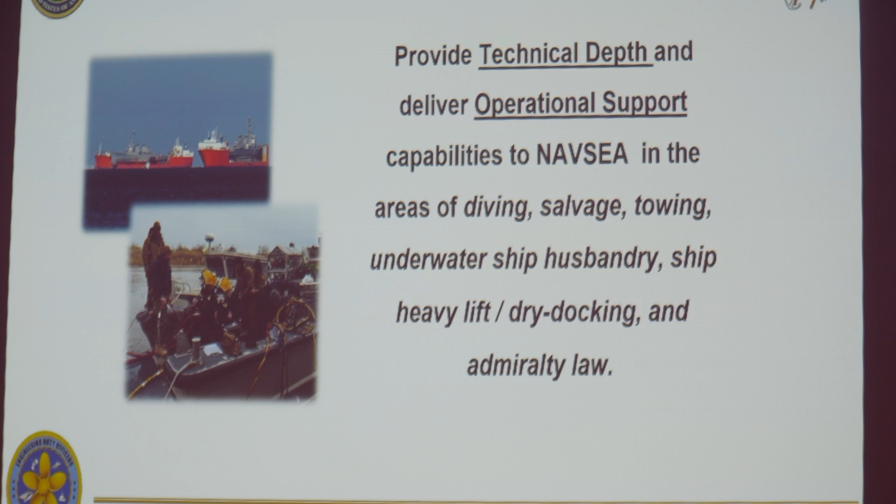A little bit of the unit history and how we came to be. Prior to the bombing of the USS Cole, there was no heavy lift capability. The USS Cole was the first emergent heavy lift of a large warship, and out of that evolution came a realization of the need to have this capability and the instructions how to do it somewhere within the uniformed service.

Over the past 10 years, the unit has conducted or participated in over 25 heavy lift operations, including emergent operations, planned operations, some of which included multiple ships and multiple lifts. Those tended to be smaller vessels, such as MCMs or PCs, that were deliberately being transported over longer distances and through more open ocean conditions than it made sense to have them go independently.

Some of our other projects, including tow of decommissioned vessels, support for vessels being transferred for foreign military sale, and a couple of specialized salvage projects, including the SSSB, which will be covered later in this brief, and the tow of the Bonhomme Richard following her fire.

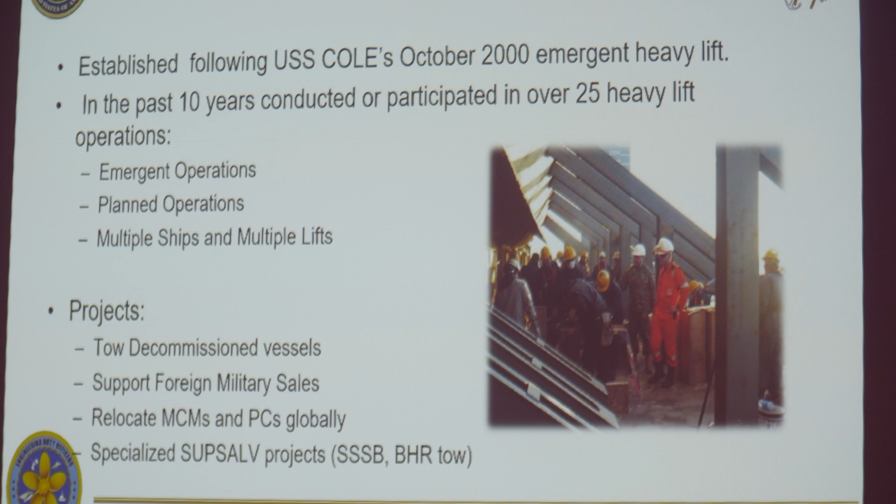Our general training pipeline involves a qualification as docking observer, typically through a regional maintenance center, occasionally through the naval shipyards, followed by training in additional blocking and stability qualifications. That's a separate qual on top of the docking observer qual. Then completion of the NAVSEA dry docking course, training on the use of POSSE, or the commercial version more commonly known as HECSALV, training in setting up vessels for tow and tow operations, and then observation of heavy lift operations.

That is the kicker, because of the scarcity of heavy lift operations, especially over the past several years. The qualification pipeline takes anywhere from 3 years, when there are a lot of operations ongoing and a lot of opportunities, to over 10 years for officers who have been stuck in the qualification pipeline.

So there are 35 heavy lift billets, but there are actually 42 officers on our roster, and that comes from the nature of the way our billeting works within the reserves and the rotations. It allows people who are being rotated to primarily support other lines of effort to keep working on those quals, again, because of that long timeline and scarcity of training opportunities.

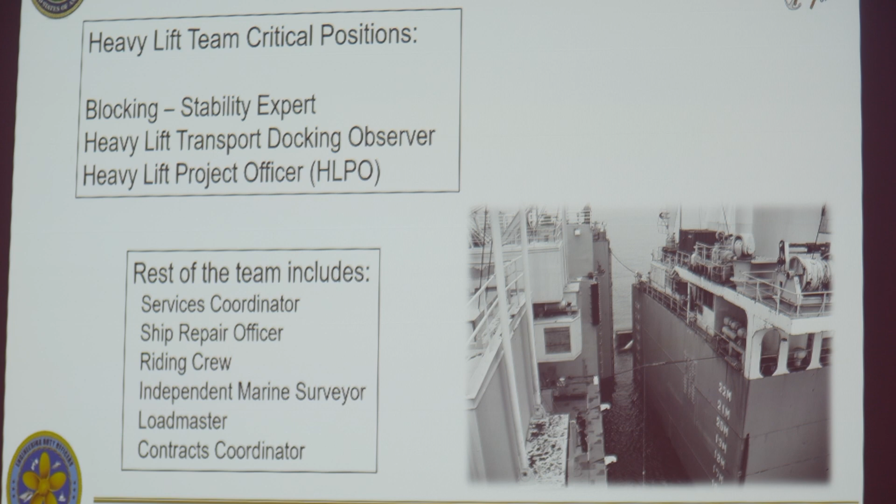In planning the evolution, the transporting contractor will provide a transport manual, and the heavy lift unit will verify all of the calculations and estimates that were made. So there'll be a detailed review of the transport manual, including descriptions of the heavy lift ship and all her particulars, overview of stowage plans, review of all the block loading calculations and sea fastenings, overview of the loading sequence.

The services and logistics tend to seem like something that would be a minor part of this in comparison to all the engineering that goes into planning how to secure the load and safely move her. However, for the most part, ships are not meant to sit empty and without power for long periods of time. And so there is still a need to provide some minimal power, to provide firefighting capability.

In particular, with the lift of the McCain and the Fitzgerald, what was very quickly realized is that international fittings often aren't, and that the lift ships, none of which are designed for lifting a destroyer as their primary customer, their primary service are oil platforms or a series of barges, were not equipped natively from ship systems to provide the amount of firefighting water and power needed to support the destroyers.

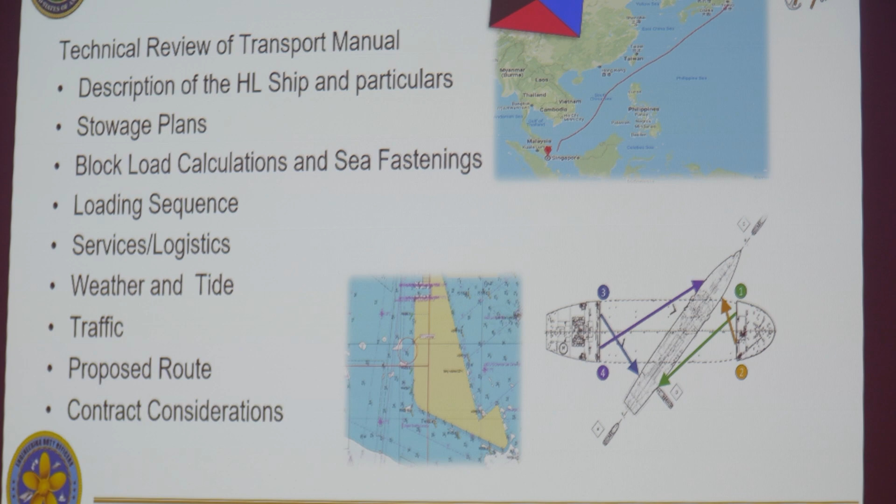In looking at the loading calculations, the proposed route, and the risk of weather, the typical sea states along that route are taken into consideration. There's a lot more sea fastening and a lot more work that goes into planning a lift that's, say, going down the coast during hurricane season or going across the Pacific than something that's going from Norfolk down to Charleston.

And I already mentioned some of the contracting considerations.

That wasn't supposed to show up that way.

All right, so in a dry dock, as all of you know, you have your keel blocks support the displacement of the ship, and you have side blocks to resist the overturning moment and support a small fraction of the ship's displacement. In the heavy lift, we add spur shores to further resist the overturning moment that comes from rolling at high angles and the additional wind loads that the ship will face in transit. And you have sea fastening to resist the longitudinal and lateral motions or sliding of the load on her blocks.

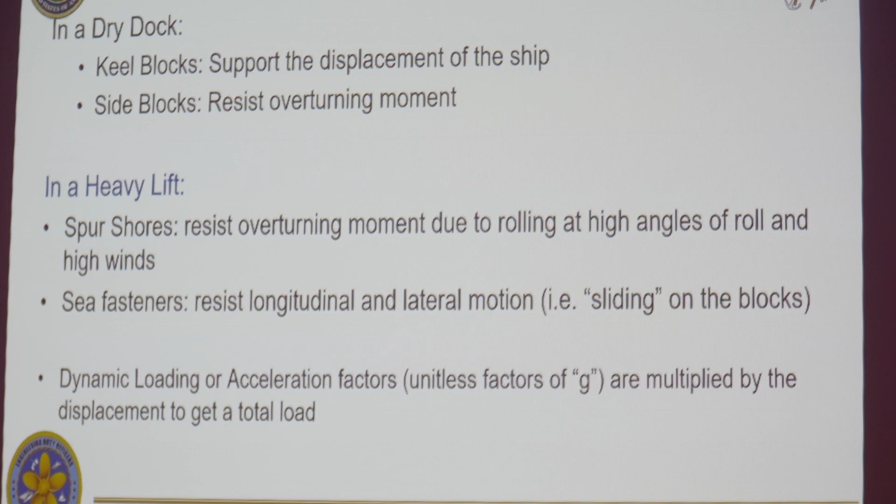There are two ways of approaching these calculations. We're going to review the calculations as they're outlined in the U.S. Navy tow manual, which is a little bit different than the method that's presented in Principles of Naval Architecture. The Navy tends to look at these calculations as dynamic loading or acceleration factors that are unitless factors of G, and then are multiplied by the displacement of the vessel to get a total load. For the most part, this yields the same results.

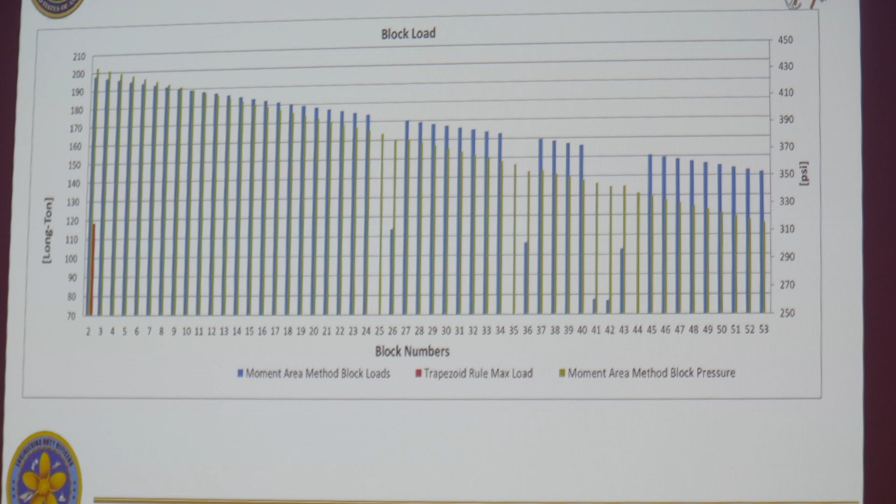In starting the planning of an evolution, the first thing we're looking at is the block loading across the typical docking plan. Most of our assets that are heavy lifted are in a damaged condition, so the trapezoidal method of calculating block loads works well if you have a continuous keel line. As you can see in this example from the McCain, which had a significant area of underwater damage, that would not have been adequate for transporting her over open water. Using the moment area method produced much more accurate results, which were later verified with strain gauges.

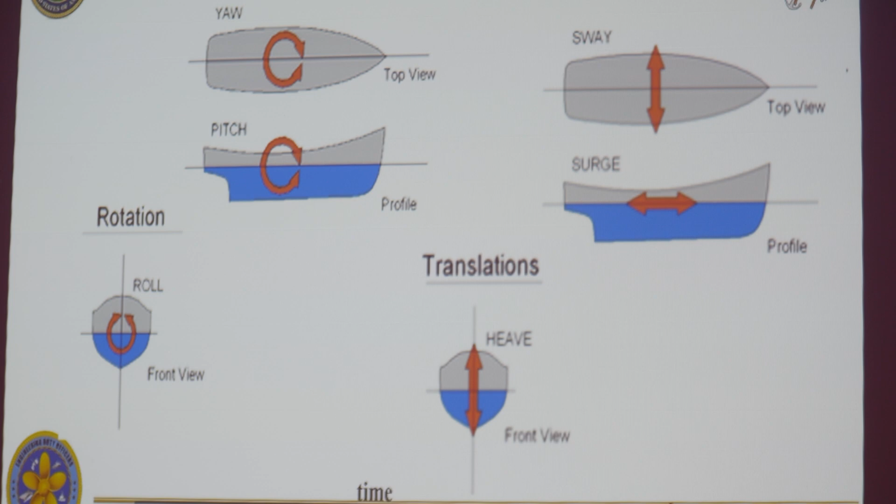The lift ship is always the frame of reference in planning the lift evolution, so we're looking at rotation and translation across 3 axes. Everything in planning the load movement is measured relative to the center of gravity of the lifting ship. This is a little bit different from the way most other calculations are presented.

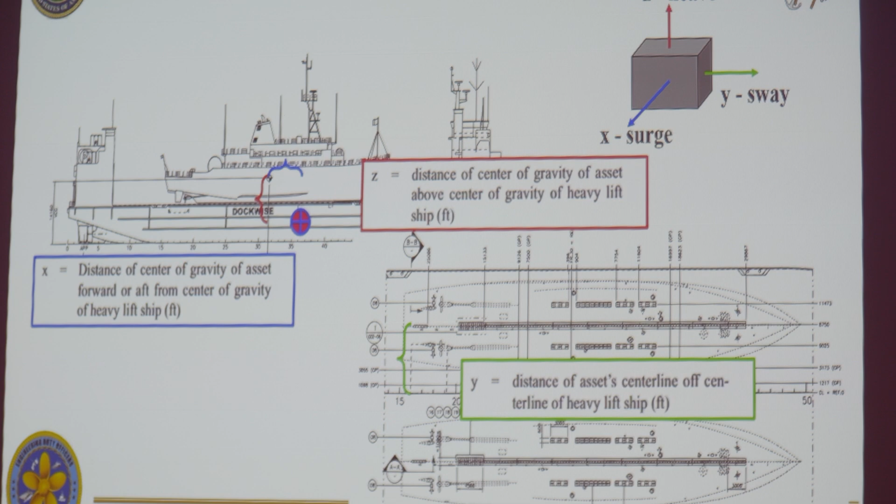A brief overview—here is the vertical acceleration formula. One note: the first term accounts for the vertical displacement of the ship initially, and then everything that follows accounts for the dynamic sea loading. So the pitch and roll of the load in transport and the period of pitch and roll are critical in determining the amount of sea fastening.

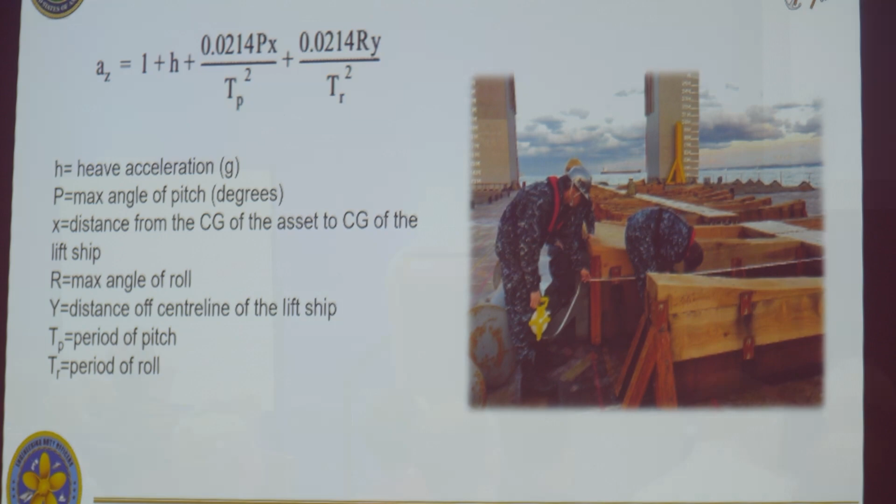There are tables provided in the tow manual to help one make a first best guess in pre-planning a lift, but typically that's all it is—a first best guess. The sea fastening design is further refined based on the seakeeping characteristics of the lifting vessel and data typically gathered from NOAA's buoys or other oceanographic sources about the expected sea states and wave periods on the route of transit. That's why route planning is a large part of looking at one of these evolutions.

Similarly, the athwart ship's acceleration is shown here, again looking at max angles of roll and pitch, periods of roll and pitch, and distance of the CG from the CG of the lift ship. You can see in the lower photo a side block, and then some sea fastening preventing motion of that side block across the deck of the lift ship.

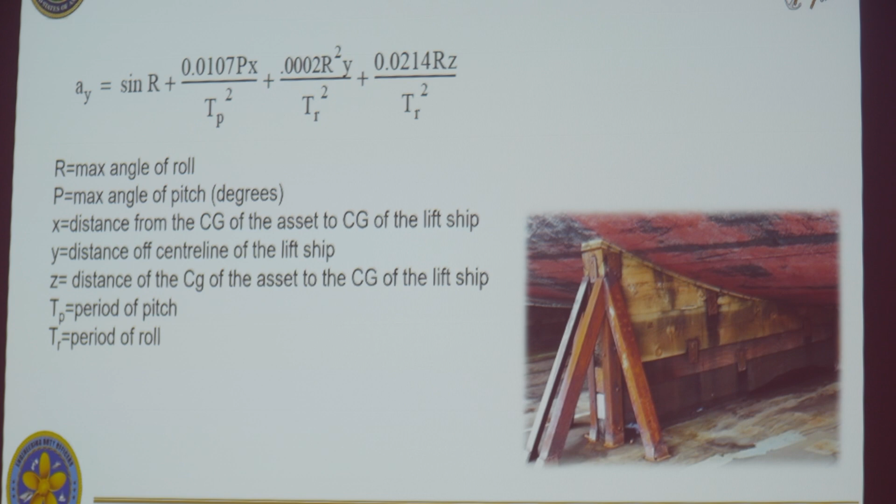One of the first considerations in planning sea fastening versus looking at a dry dock is that I'm not trying to do maintenance on this vessel—I'm just trying to move it from point A to point B safely. Whereas in planning a dry docking, I may want very high blocks to facilitate dropping a rudder, accommodating a propeller, pulling shafts, or doing a full inspection of the bottom, in this case I want the smallest blocks I possibly can get to keep the CG of my load as close to the CG of my lift vessel as I can.

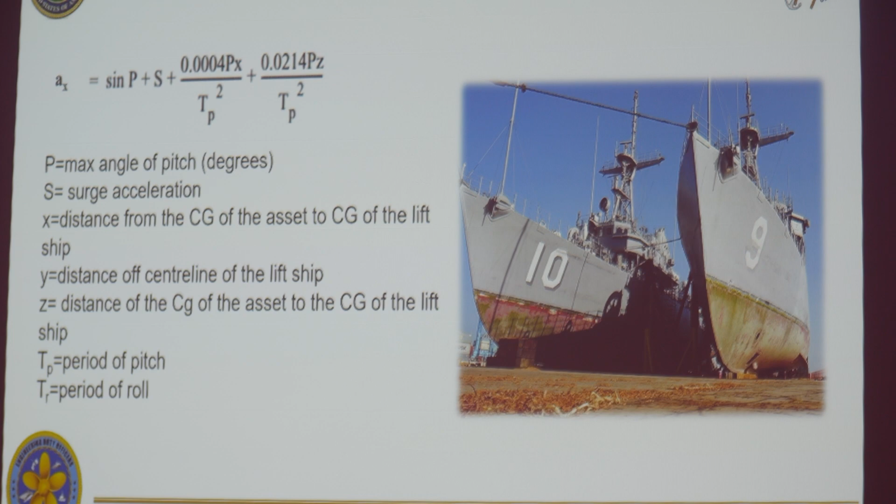Here you can see 2 MCMs nested side by side on a lift ship, along with the formulas for longitudinal acceleration. The step-by-step of how to calculate sea fastening is presented in the tow manual—it would be longer and more involved than Joe wanted me to get into in this particular forum, but I think they do a reasonably good explanation of how you get there. In contrast, Principles of Naval Architecture takes a look at the forces independently and then adds them to the total displacement.

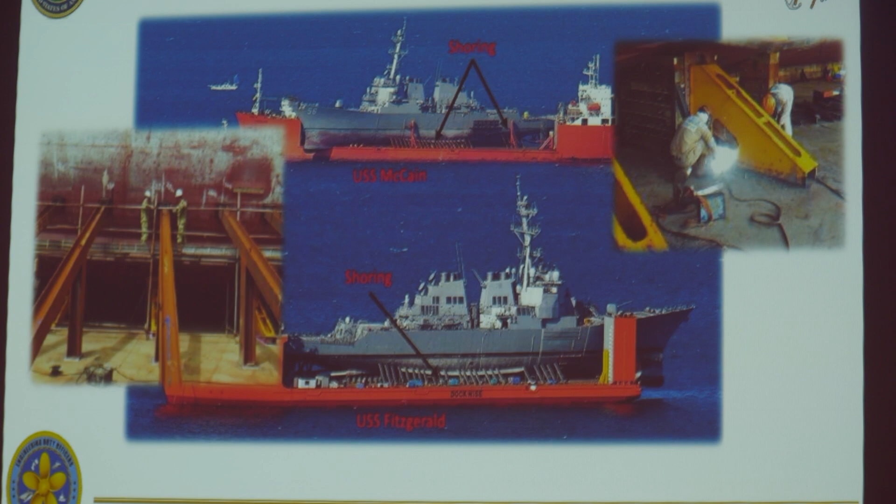One of the other things you can see in the photos, you have 2 officers inspecting some of the shoring, that gives you a good sense of scale for the spur shores and the sea fastening being installed on Fitzgerald. And here's a little bit better overview of the positioning, particularly of one of the ships across the deck.

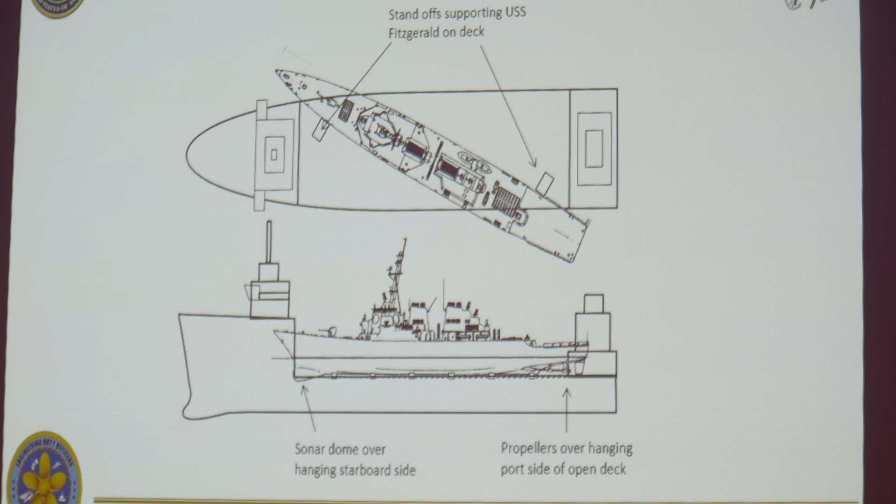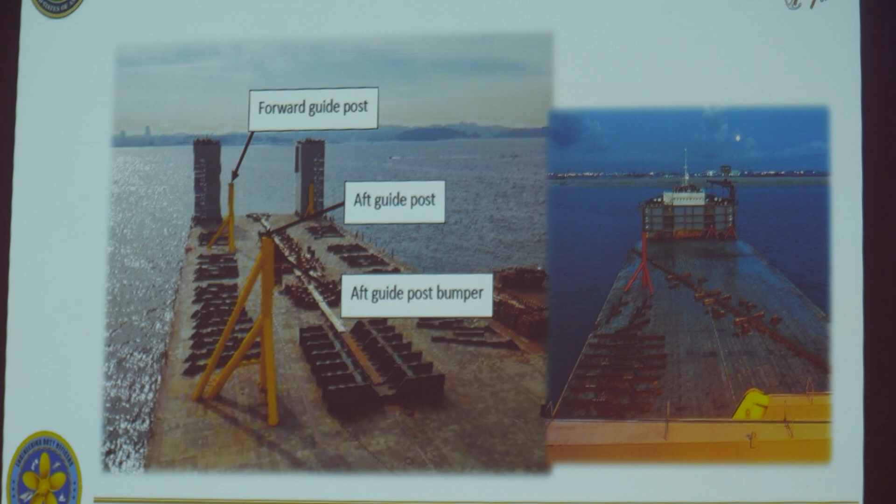Here's what that looked like in real life. The guideposts are exactly that, positioning markers. So when the lift ship submerges, there are very few landmarks, if you will, to use to properly center and position the load over the build. That is the function of these guidepost bumpers. They also provide some sea fastening support, but because they will be fitted up tightly against the hull during the final preparations, they're not included in most of the planning as anything other than positioning guides.

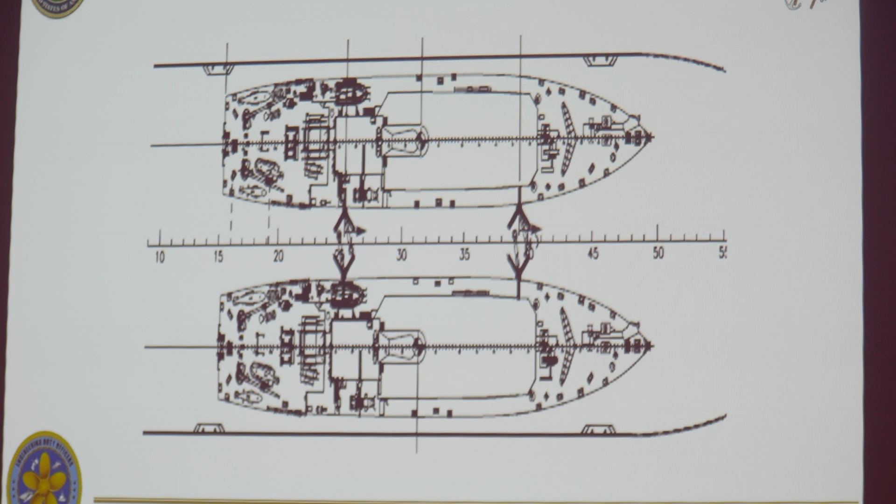This is an example of an MCM guidepost layout with two MCMs side by side on the lift ship. One of the challenges in moving MCMs is they have a tumble home hull. So whereas many ships, the max beam would be at the main deck, the MCMs actually turn slightly inward, getting slightly narrower as you come up to the main deck. When this lift was actually conducted, this was not fully accounted for in the planning of how those guideposts would contact the hull to verify that the MCMs were firmly over their build. So the final configuration actually had them somewhat more askew.

This is a brief overview of POSSE, or again, the commercial version of HECSALV, showing that we can model the lift. This is often used as a secondary means of verifying the loading plan and modeling whether or not the lift ship is adequate to carry the load fully and fully support it.

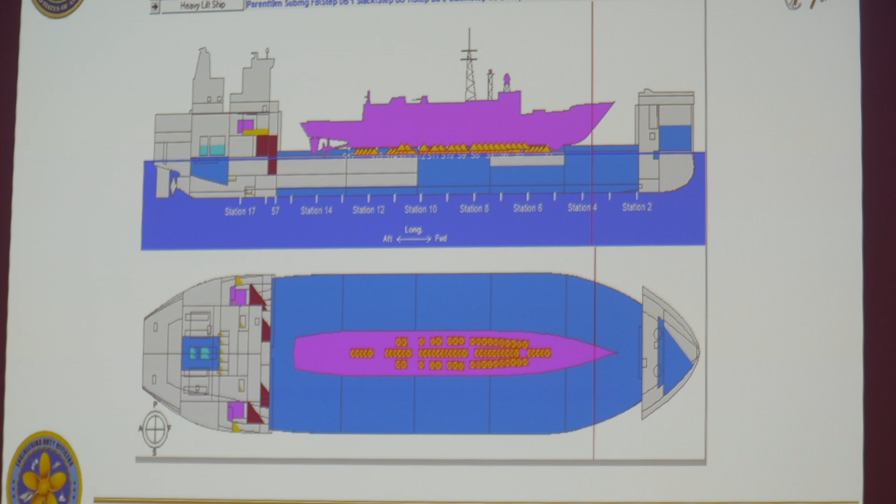So the two big, sort of infamous emergent heavy lifts the unit recently participated in were the response to the collision of the USS Fitzgerald in June of 2017, just southwest of Tokyo. The ship was towed to Yokosuka for temporary repairs and then heavy lifted to Pascagoula for further repair. Unfortunately, about 2 months later, the McCain had her collision in August off the coast of Singapore. She was initially towed to Singapore for temporary repairs and then lifted to Yokosuka for permanent repairs.

There had been a plan to lift her to Yokosuka to perform some initial remediation and then do a second lift either to Pascagoula or to Bath.

So some of the lessons learned that came from planning the lifts, one of them was there was a tight time frame and a very small weather window for some of the work that was conducted. And so after the ship was positioned over the build, but before she was fully deballasted, the work crews started positioning the sea fastenings.

This created some future problems, because the lifting ship was flexible relative to the amount of load that she was carrying into her positioning. And so those sea fastenings that seemed to be tight up against the hull and firmly supporting the load when they were inspected, once the ship was fully deballasted and in a seaway, there was gapping in them. And that led to the cracking that you can see in the picture there.

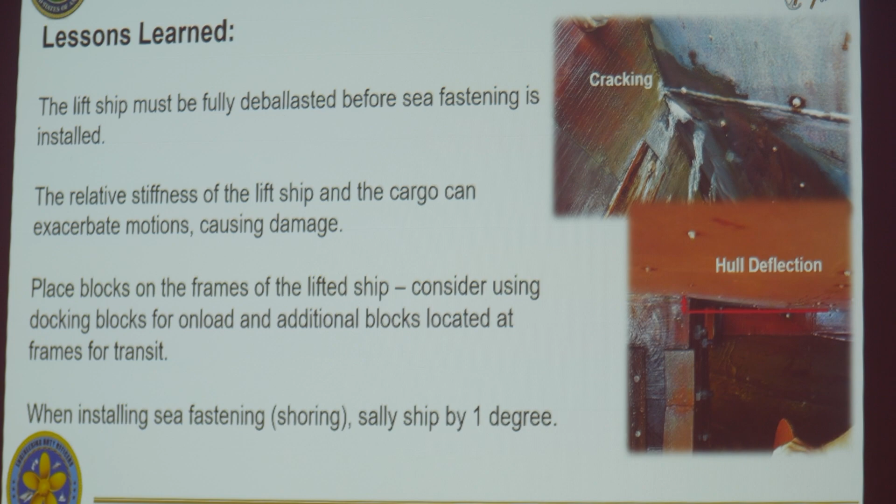The other revision to the procedure that came out of this was that when installing sea fastening, not only to make sure that the lifting ship is fully deballasted, but actually to sally ship by 1 degree in each direction. So induce a deliberate list of 1 degree, install the shores tight against the hull of the load on the opposite side, on the high side, and then roll her in the other direction by 1 degree, and install the sea fastening tightly against the other side.

For the most part, when we did this on the next lift, it worked well. Unfortunately, there was a new problem.

The team did start with the original docking plan and then moved the blocks to accommodate the intersections of the frames, and they sallied ship when they loaded her on. This ship had room to fully support Fitzgerald in a fore and aft configuration and mitigate a lot of that motion between the load and the lifting ship, but the deck was not initially strong enough to support Fitzgerald's full load.

So rows of grillage were installed to better spread the load of the DDG across the cargo ship. The positioning of the grillage and the revised docking plan was designed based on tables of offsets that were provided with the hull. But the team during the design used the longitudinal framing tables rather than the transverse framing tables, which didn't fully account for the change of rate of curvature of the hull.

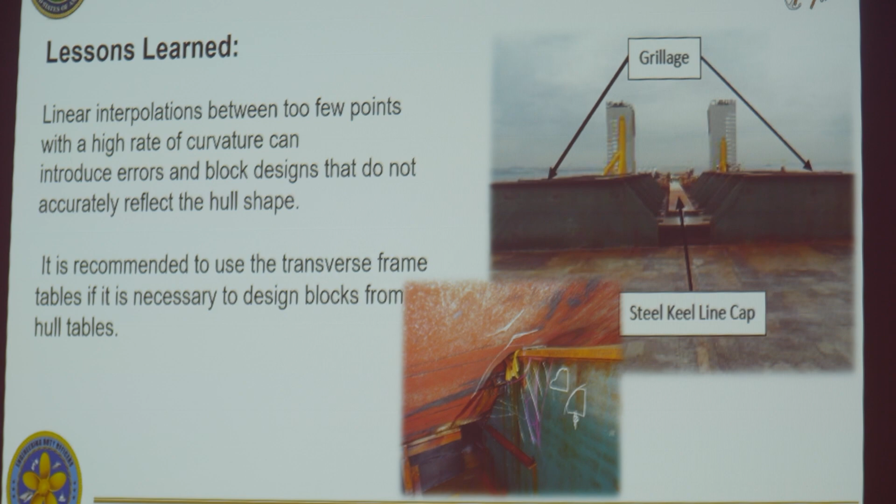As you can see in the picture there, the grillage went through the Fitzgerald's hull in a total of 2 places into a fuel tank. Again, in a typical docking, this is something that would be considered a major incident. And while it certainly delayed the evolution and was additional damage to the ship, the state of the Fitzgerald that necessitated heavy lifting in the first place, this was minor damage in comparison.

A more recent and planned evolution was the transport of the surface ship support barge. The surface ship support barge was a Liberty tanker ship from the World War II era, the ones that were somewhat infamous for breaking apart while at sea. We took her midsection, added approximately 10 feet of new extension on the forward and aft ends, and then used her to support nuclear work on aircraft carriers for many, many years.

This evolution involved undocking the ship at Newport News shipyard, transfer up the river by wet tow to Colonna's, docking at Colonna's, and then transferring via SPMTs onto a seagoing barge for eventual offloading at Alabama shipyards. And by the nodding heads, I see a few familiar faces that a good handful of you were also involved in this evolution.

So there were many moving pieces. From the heavy lift unit perspective, no one in the heavy lift unit at that time had familiarity with the SPMTs and the rolling transport of vessels.

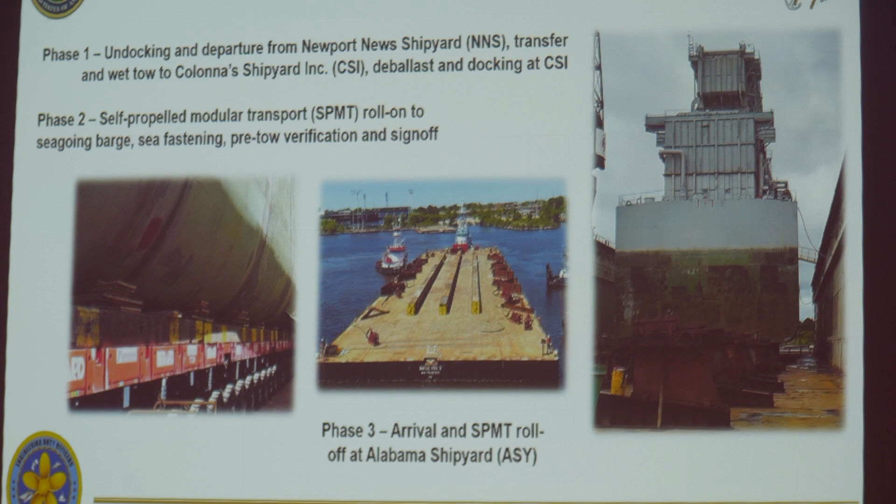So the folks at Burrard Transport were very patient with us as we asked them many, many questions and reviewed their calculations. One of the most interesting coordination points was maintaining consistent draft between the floating dry dock at Colonna's and the barge as the weight of the SSSB shifted from one floating structure to the other.

A few of the lessons learned and complications out of that evolution was that the SUPSALV or NAVSEA 00C requirements were not written into any of the contracts among all parties involved. That was an oversight by the contract writers, where the heavy lift unit was responsible for overseeing safe transport and was very cognizant of the potential public affairs disaster should things go wrong. But our oversight requirements for sea fastening, observing the undocking at Newport News or docking at Colonna's, our requests for calculations, and our requirements to secure internal loads to the SSSB were not part of the contract planning process. That was one of the big feedback points throughout NAVSEA—to include heavy lift oversight requirements a little earlier in the planning process.

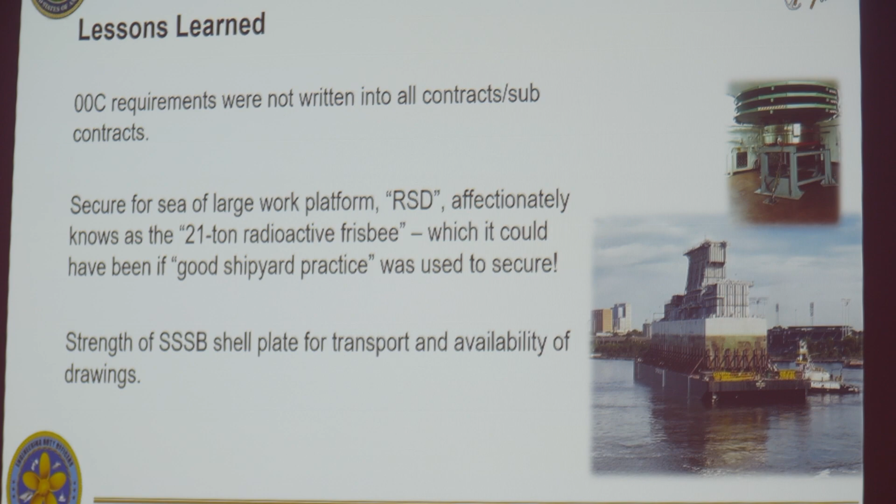As it turned out, the flat faces of the SSSB, shown in the lower photo, which both made the wet tow very slow, were the point of weakness. We actually had to require the transporting contractor to double the amount of shoring they had anticipated using, because the side force of the load against the shoring would have buckled or more likely cracked that plate. So the revisions to the tow manual will now include notes to review the structure of the lifted load prior to signing off on the sea fastening plan.

Most of the time, sea fastening just following the basic guidance in the tow manual is more than adequate relative to the ship's structure. This was an unusual situation in many ways.

I have finished up just a few minutes early, leaving time for questions.

Somebody has to have a question, or Joe's going to leave me standing up here forever. Go ahead.

So you said the lead time for design was 60 to 45 days. Did that include all your calculations and the checks and rechecks? Yes, ideally we would have between 60 and 45 days. In both the McCain and Fitzgerald timeframes, we had much less time than that. Due to some staffing shortages at Schmidt, rather than Schmidt completely preparing the sea fastening design and turning it over to Heavylift as a set of second checkers, we were designing a set of sea fastenings right along with them and passing the design back and forth.